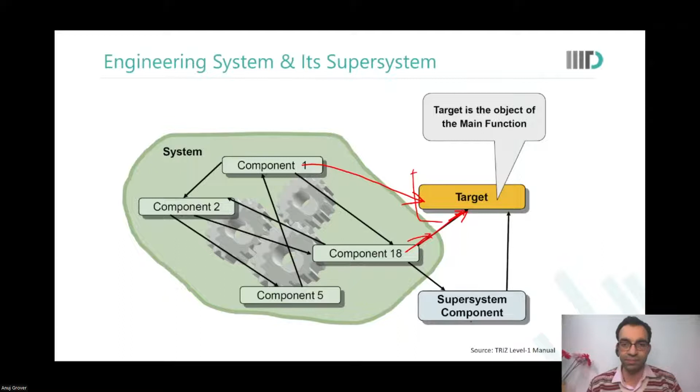Now, what we are saying is that once we have identified the target, we should know what parameters of the target are also changing as a result of the main function. First, main function cannot be removed. Then we should understand what is the desired change in parameters, and then we should try to enhance it. For whatever projects you are choosing to work on, once you know the target, you know what the main parameter is, and then you can work to improve the performance of that function. Okay.

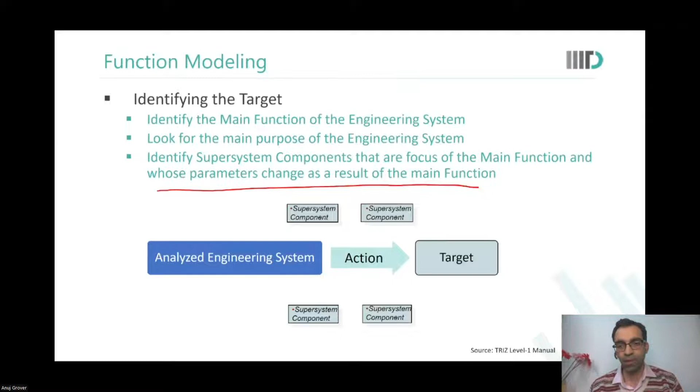Now, functions can be categorized into two kinds: useful functions and harmful functions. Useful functions change the parameters of the object of the function in a desired direction. For example, in yesterday's office hours, we were discussing the problem that due to online e-commerce, local shops are suffering. So we were thinking of a solution where the local shops would get more footfall or more orders, and they would be able to recover their loss of income. So that would be the useful function.

Now, there could be other parameters, or there could be other components in the super system or in the system which could lead to worsening the parameters of the object of the function. Those functions are called harmful functions. For example, we could say that Blinkit has some harmful function for the local vendors here. Or Swiggy Instamart would have some harmful function for the local vendors there.

But the solution that we are providing is providing useful functions. It is removing the harmful functions that Blinkit has. It is removing the harmful function that Swiggy Instamart has. So it is important to understand what are the harmful functions in an engineering system also, so that overall efficiency of the system can be enhanced. So functions are categorized as useful functions and harmful functions.

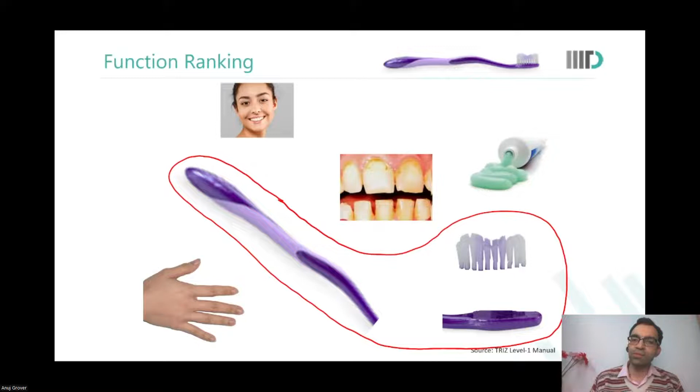Okay. So we now know what is the engineering system, what are the super system components. So now we start to plot the functions there. Hand moves handle. Hand holds handle. Handle holds the head and moves the head. Head holds and moves the bristles. Bristles distribute paste. Bristles remove plaque. Toothpaste removes plaque. The handle informs the person what is the progress in terms of brushing the teeth. So all these functions are happening in this engineering system.

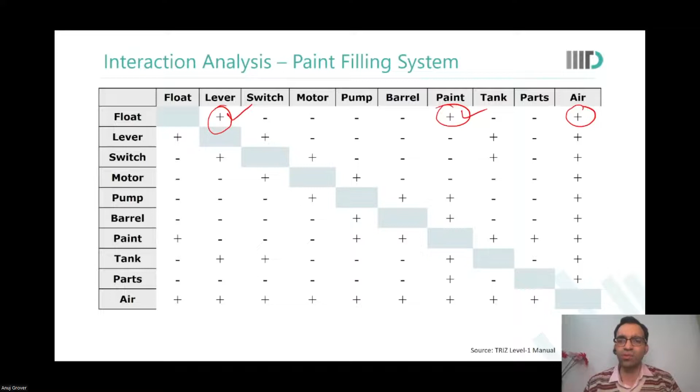Now we pick up each component and see what are the functions defined there. So let's look at float. Float moves lever and it holds paint. You see, it is touching lever and paint and air. There are functions between lever and paint. The fact that air is in contact with the float is not of much significance for us. Air is just there, so no function is formed there. Then we look at lever. Lever holds float and it controls the switch.

Now what we are saying is, because what was happening? The paint was overflowing. Why did it overflow? Because the float did not move the lever sufficiently. So what did we say? That this function is performed insufficiently. Now, lever holds the float properly, that is acting normally, but lever is not controlling the switch sufficiently. Because if the lever was controlling the switch sufficiently, the switch would have turned off the motor, and then extra paint would not have been pumped in there. So the action on switch is insufficient.

Now the switch controls the motor. For the motor, it is the switch that is not controlling it properly. So this action is insufficient. Now, when it comes to the pump, for the pump, motor is rotating the pump for extra time. It is happening excessively. That is where it is harmful also. Due to this, pump moves the paint excessively. And you notice we have put basic over here because paint is the target.

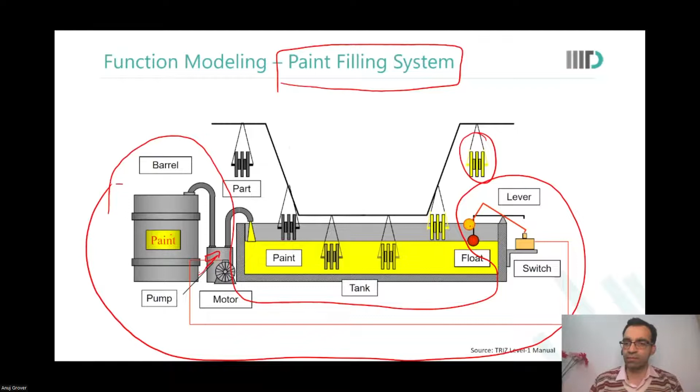When we defined the problem, we said the float becomes heavy. Therefore, it does not rise sufficiently, and therefore the system is failing. So every 1 month we have to change the float, or we have to stop the system, and we have to clean the float, remove the paint from the float. When we described the problem, that is how we described it, na? Right, sir. So it's not an assumption. This is the problem statement.

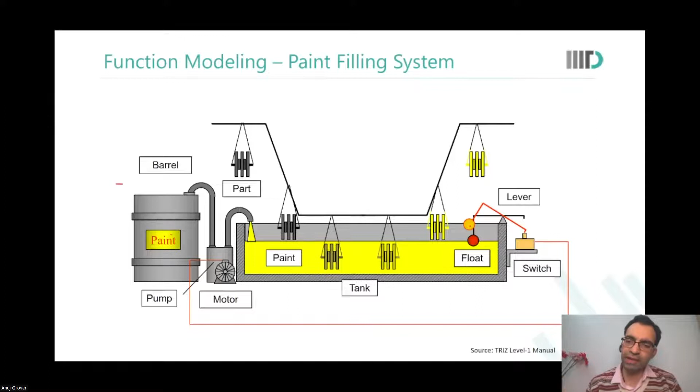This is already defined for us. Cause effect chain analysis has already been done. It is the float which is the cause, that we have understood. Is it okay? Yes, sir. Understood. Thank you. So that is why we did cause effect chain analysis before function modeling, so that you know where the cause is and then you model around it.

Okay. So a quick review of what we are talking about. We are saying that main goals of the function analysis are to provide a functional representation of an engineering system, so that we don't get bogged down by other details and we can focus on the problem at hand. To identify functional disadvantages of the components of an engineering system, and to rank the functions for further trimming, for further action. This is such a costly component, but it is not performing sufficient functions. So let us trim it and give the function that it is doing to something else.

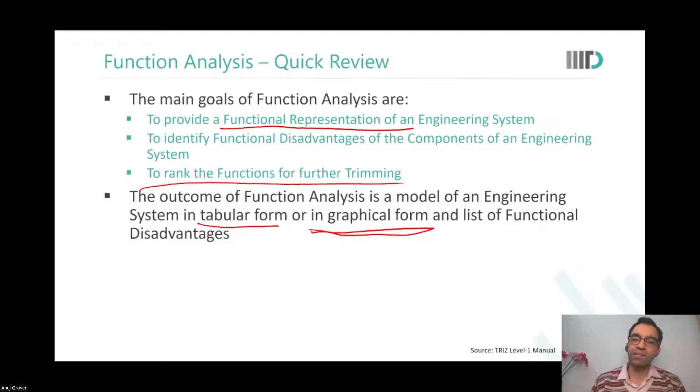So the outcome of function analysis is a model, which could be in a tabular form, but preferably in a graphical form, and a list of functional disadvantages. So some key terms: function is an action performed by one component to change or maintain a parameter of another component, which is called the object of the function. Function carrier is the component performing the function. Object is the component whose parameter is being changed as a result of performing the function. Parameter is a comparable value of an attribute.

Main function is the function for which an engineering system exists. Why the engineering system was put in place in the first place is the main function. Basic functions are useful functions directed towards the target. So main function is also a basic function. Additional functions are useful functions that act on components of the supersystem that are not the target. Auxiliary functions act on other components of the engineering system itself. And then we assigned a rank to every function. Basic functions were assigned a rank of 3. Additional functions were given a weight of 2. Auxiliary functions were given a weight of 1.

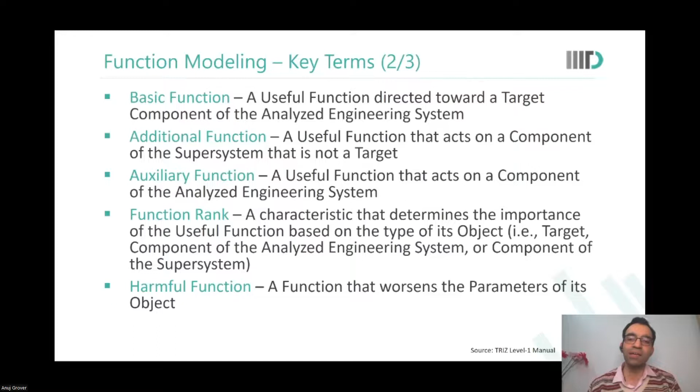Harmful functions are those that worsen the parameters of its object, move them in an undesired direction. Useful functions change the parameter of the object in the required direction. A function model of a system describes all the functions performed by various components of the system and its supersystem, where we categorize them as useful and harmful, on the quality of performance and also cost. हमने अभी cost की बात नहीं करी अभी तक, but in terms of cost level, we say the cost is insignificant, acceptable, or unacceptable. ठीक है? And the value of any component is sigma of functionality upon sigma of cost.

If actual value of a parameter is greater than the required value of the change in parameter, we say the function is excessive. If it is less, the function is being performed insufficiently. And if it is at a desired level, the function is performed normally. यहाँ तक clear है? Any questions? Because then I would want to move to the next step, which is called trimming. I want to cover at least some part of trimming today so that you can go back home, start to work on the function models of your system and see if trimming is possible there or not. Any questions still here?

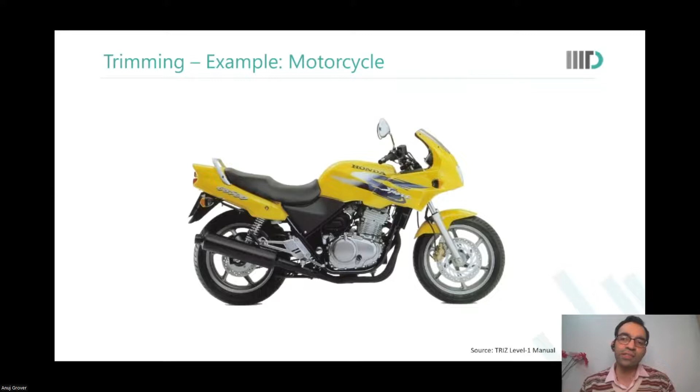So we made the function model of the motorcycle. We broadly said there are a few components of the engineering system: motor, wheels, frame, gas tank. There are supersystem components, which are road and gas, and there is a driver. Driver is the target because the driver is being moved. The motorcycle, all of this moves the target only. So driver is the target.

And now we looked at, see, which thing can I trim? Can I trim the motor? If I trim the motor, is there anything else in the system that can rotate the wheels? Can the frame rotate the wheels? No. Can the gas tank rotate the wheels? No. So no way, I cannot trim the motor.

Looking at the wheels, can I trim the wheels? If I remove the wheels, what will work on the road? So the road needs to be in contact with something which should move. So nothing else in the system, neither the frame nor the gas tank nor the motor, I would want to be in touch with the road. So the wheels also cannot be removed.

Now, if I say I trim the frame, then what will hold the wheels? What will hold the gas tank? What will hold the driver? Really, itni sari cheezon ko hold karna hai, the frame is needed. Then we look at the gas tank. Can I remove the gas tank? See, gas tank is performing only one function, which is holding the gas.

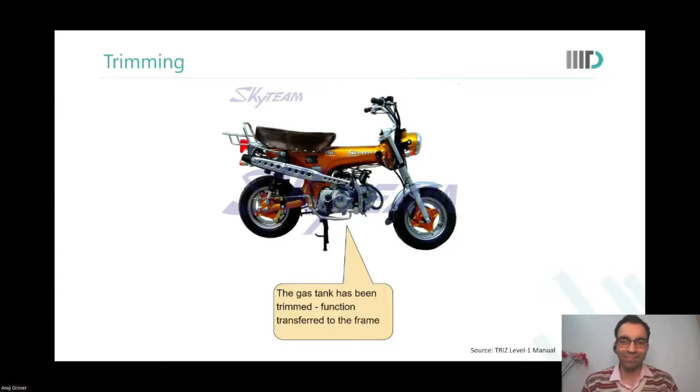Yes, sir. And for a product, can we say the context is basically the stakeholder? The context is the customer. You may say that stakeholder. हाँ, stakeholder भी कह सकते हो, vendor भी हो सकता है. But primarily for businesses, it will be customers. Customer is God, huh? Yes.

So let us look at a few guidelines for trimming. See, select components based on project goals and constraints. अगर मेरा project goal होता कि I have to impress my social circle also, then I would have put that also as a component of my super system and a function associated with it. वो नहीं था तो मैंने नहीं डाला था अभी बाइक के साथ, है ना. And then we trim the components with key disadvantages in order to maximize the improvements of the engineering system. And we cannot trim if there are no acceptable alternatives.

Okay, we will just look at some rules of trimming, and in the next class we'll also look at radical trimming. We can't cover radical trimming today, it will take a little longer, but we will look at some rules of basic trimming, so that you can just experiment with the projects that you're working on. And if you perform radical trimming, you will see that the solutions could be very, very neat. But again, it is possible only if the project goals and constraints allow that to happen. Okay.

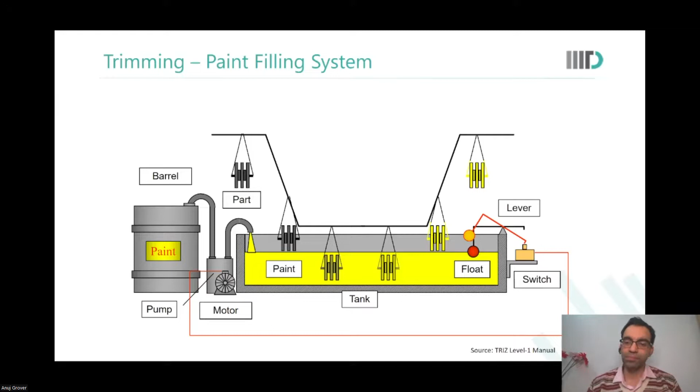Let us look at the paint filling system example. In the paint filling system, we had this function model. Now we see that there is a harmful function that the float is performing on the target. Let us say we want to trim the float. If I trim the float, what do I need to do? If I trim the float, all the useful functions that the float was doing need to be reassigned to something else. So automatically, since the float is gone, the harmful function is already taken care of. No need to worry about anything.

Now, the float was doing one useful function, which was moving the lever. Now my problem is how to move the lever so that the system can still function well. Can you think of ways in which paint can directly move the lever? Because paint was moving the float earlier. Now, since the float is gone, can we think of ways in which paint can move the lever directly without the float? Can you think of some ways?

So you can use the property of the weight of the paint. As the weight increases, something can be done. Likewise, the tank could be associated with the lever. Very good. Very good. So what we could do is we could say that

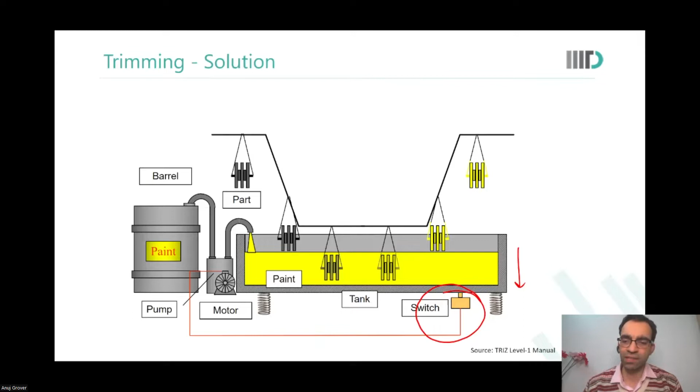So we can maybe have a timer that, depending on the paint, starts the motor and stops the motor. See, they do not want to go in with sensors and timers there because they are costly components. Springs are simple, very easily available, very cheap. But timers are electronics. You have to add many more things in the system. In trimming, you want to remove as much stuff as possible. You do not want to add stuff. Okay, let me give you another example.

What if the function of controlling the switch could be performed by air? Abhi tak we said that the function of controlling the switch was performed by the tank. Can you give the function of controlling the switch to the air? Yes, sir. But then the chamber must be closed, and a panel would be there on top of the paint, so that whenever the paint moves up, it moves that chamber also, and as the air vents out, the switch could close. Very good, very good.

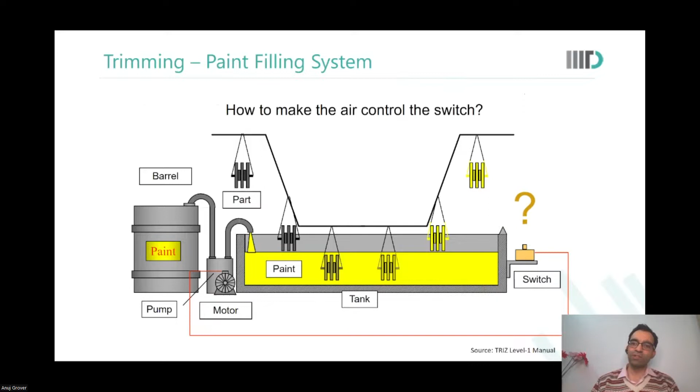So we have trimmed this. Now we say that the air controls it like this. As the paint moves up, the air in this tube compresses. It pushes the switch down. हाँ, good. So आप लोगों को तो सब आता है. आप लोग तो solutions निकाल सकते हैं अपनी problem के लिए.

So see, now we have already moved into solution finding. That is not the intent. The intent of trimming is to define a new problem. What was the initial problem? The initial problem was the paint is spilling on the floor and I do not want that to happen. That problem has now changed to how to make the air control the switch. है ना?

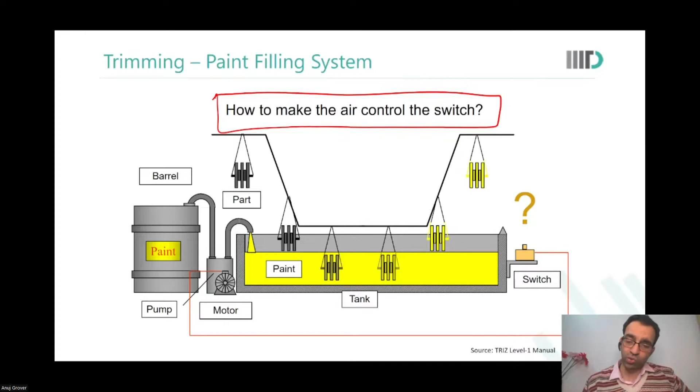And controlling the switch we could simply do by using this kind of a thing. Also, here we solved one more problem, that air was solidifying the paint. So that was also solved. So now I could have an inert gas in between which would not interact with the paint at all, would not solidify. Or it could be air with some vapors in it which would not let the paint solidify there. That way this pipe remains clean throughout.

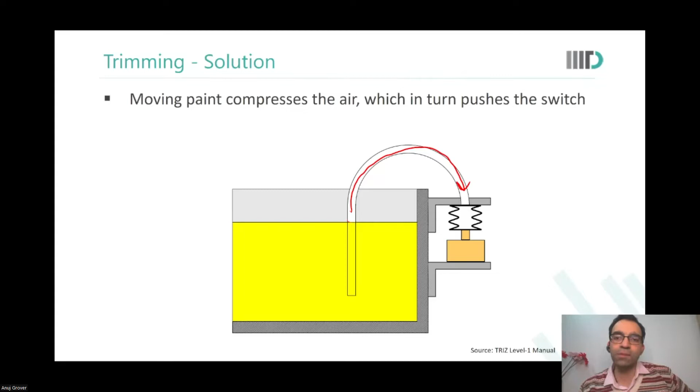So what we really need to do is define what are called trimming problems. How to make component 2 perform function 1. How to make component 3 perform function 2 by itself. At the end of this trimming exercise, you will have a long list of trimming problems which may be simpler than the initial problem, or more complex, we don't know. But instead of that one big problem which might have been intractable, now you have multiple problems to work on. And you can choose the simplest one, the cheapest one, the most effective one.

So that is why trimming is part of the problem identification stage. It is not part of the solution finding stage. चाहे मैंने अभी solutions भी दिखा दिए, but trimming is only about defining the new problems. We will use ideation methods to find solutions later, but abhi we are simply defining new problems.

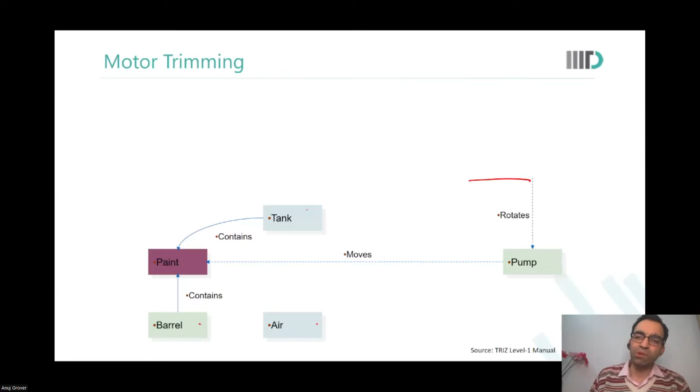So either something should rotate the pump or something should move the paint. I say pump, let me remove, because let me remove that cost. So something now needs to move the paint. Now there are only air, tank, barrel, and paint. We have already seen that air can be used to control the switch. Do you think you can use the air to control the paint also? Now the trimming problem is, who moves the paint? Can the paint move itself?

Any ideas? When I tell you the solution, you will say, oh, we see this every day. Sir, the tank can be placed at a higher potential, so with potential energy the paint can easily pour itself down. Yeah, but we have to control it. We have to also stop the paint from moving when the tank is full. So we can put a horizontal pipe from the barrel to the tank, and the height would be the same. Whatever height is in the barrel, the same height will be maintained in the tank.

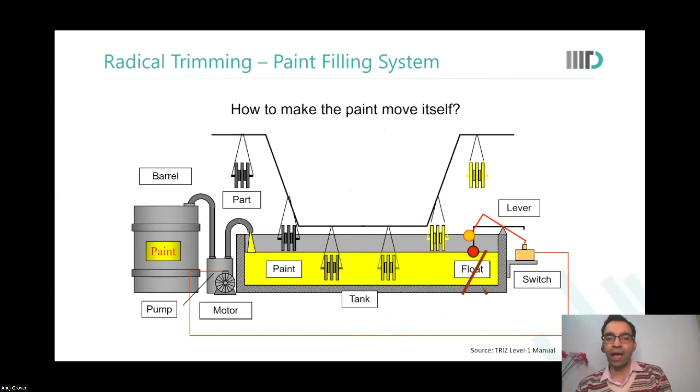So again, the purpose of radical trimming was not to come up with a solution. It was to provide a new problem: how to make the paint move itself. See, what was the first problem? How to prevent the spillage of the paint. You've now changed it to how to make the paint move itself so that the spillage doesn't happen. And you could arrive at a simple solution, based on gravity, hydraulic pressure, and everything.

Okay. So trimming is driven by a set of hierarchical rules on how to redistribute useful functions of trimmed components. Maximum improvement of a system can be achieved when a function is performed without any surplus components. In this engineering system, there is no extra component, just the pipe and the barrel. That's it. No pump, no motor, no switch, no lever, everything has been removed.

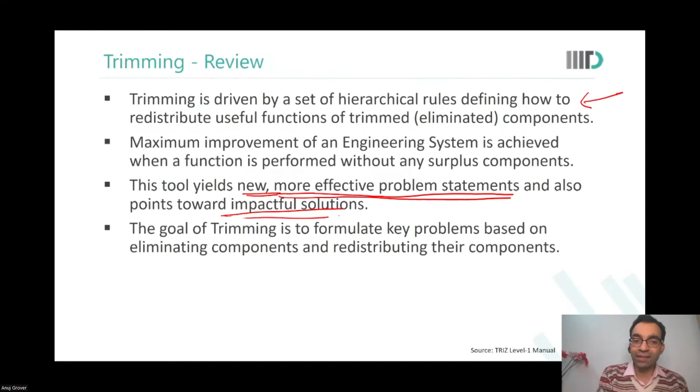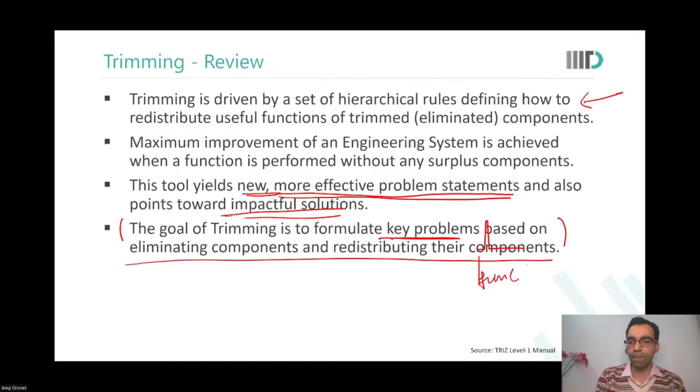The beautiful thing is it brings to the fore new and more effective problem statements, taking us towards more impactful solutions. Again, I reiterate, the goal of trimming is to formulate key problems based on eliminating components and redistributing their functions. Okay.

So we just saw that this is a very unique technique. It reveals a set of problems which we do not otherwise see. It reduces the costs and improves overall functionality of the system. Overall value of each component is enhanced. And how much trimming you want to do depends on what kind of changes you are open to.

And the trimming exercise will give you multiple options on, okay, I can trim this. For example, for the toothbrush, we said we could trim the handle, the head, or the bristles. So there is a huge range of new problem statements that would appear depending on what component I decide to trim.

So we'll close it with some key terms about trimming. Trimming model is the model of an improved engineering system developed through trimming. Trimming problem is a problem that must be solved to realize the trimming model. Trimming rules are how to eliminate a component by either eliminating the useful function, the object of the useful function, or redistributing the useful functions to some other system components.

Redistributing the function means that some other component in the system or the super system will take up that function. Similar function means functions with similar objects and/or actions. That something is holding and moving something else. We said the handle is also holding and moving, though it is doing that to the head. It is a similar function performed on a different object.